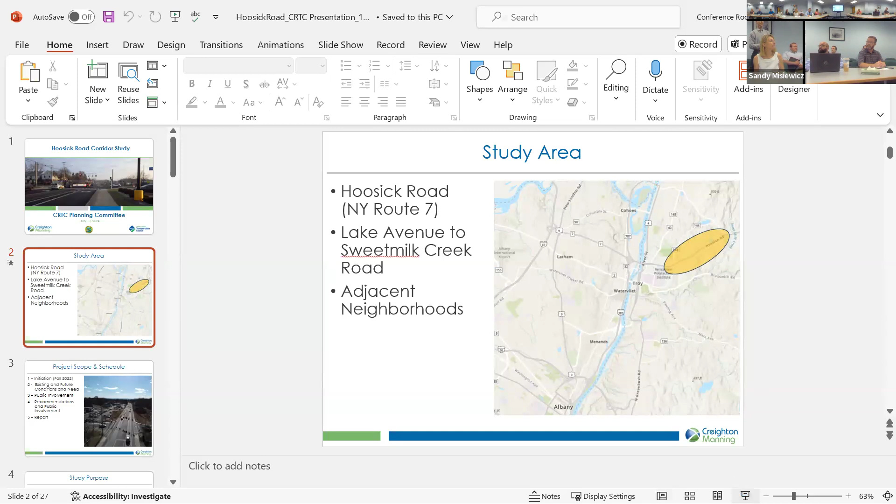Great, good morning everyone. We put this in PowerPoint slide mode, and we'll go through it. The study area for this linkage study is in the Town of Brunswick, just northeast of Troy. It's a section of Hoosick Road extending from Lake Avenue out to New York Route 142, a distance of about 2.5 miles. That Route 142 intersection is where there's the Stewarts, also called Sweetmilk Creek Road, that little local street that heads off there. So it focused on that section of Hoosick Road, Route 7, and also the adjacent neighborhoods.

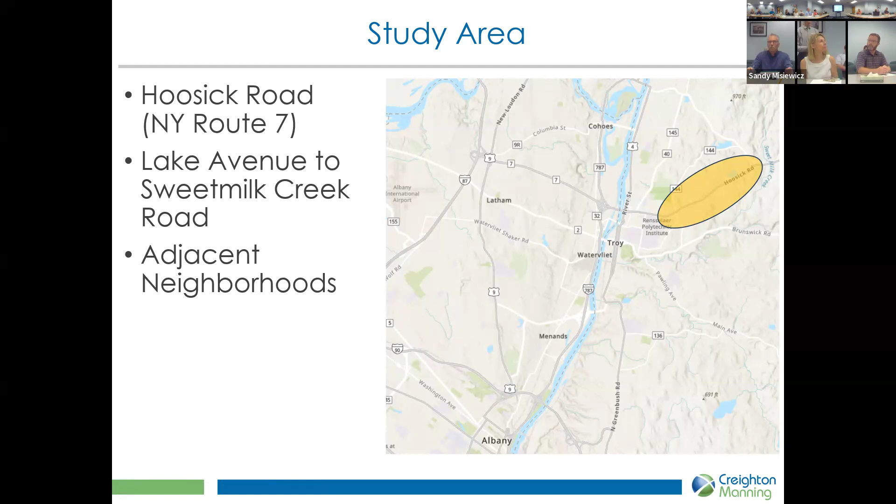The purpose is really to reduce congestion to the extent we can in a corridor that's constrained like this, and widening is really not an option. Improve safety and improve multimodal mobility.

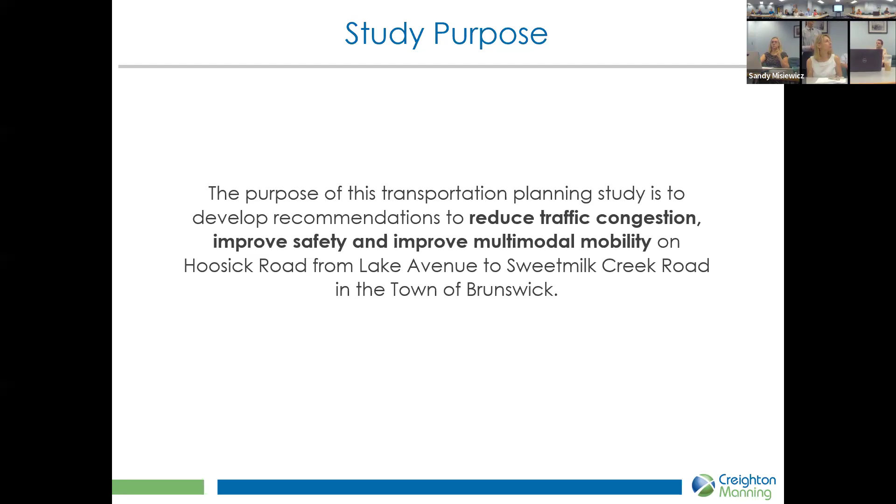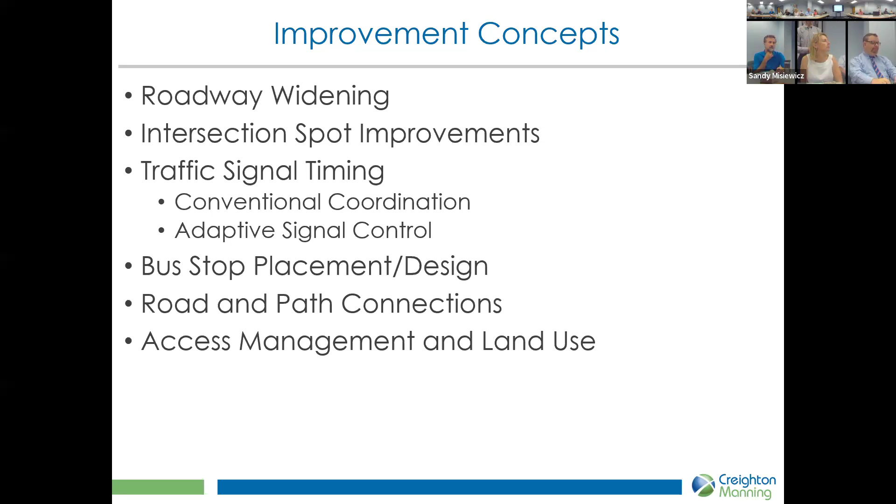We all know that you can't really build your way out of congestion, and we used that to inform the public of the challenges of this corridor.

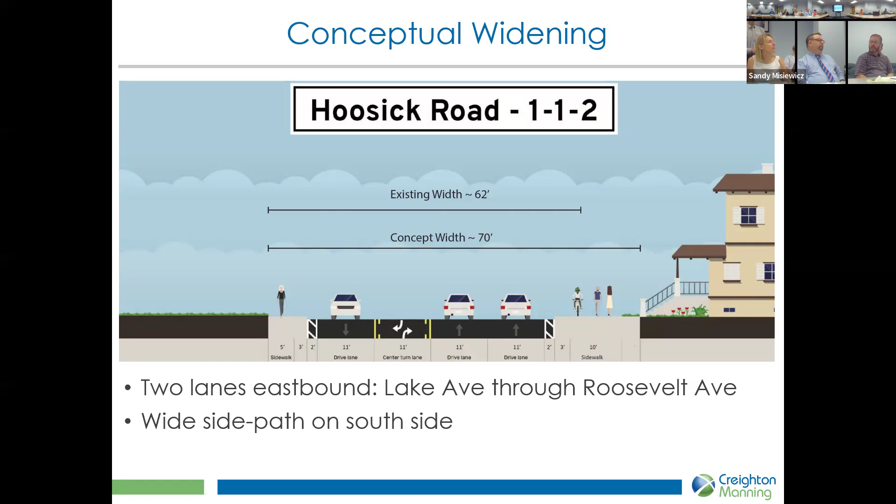We did introduce this idea of what we call the 1-1-2: one lane inbound, two lanes outbound toward the Vermont direction, to see if this could have any advantage. It certainly had fewer property impacts, but still probably not practical. It had a small travel time benefit, so it didn't go very far, but it would be similar to the section of Fuller Road here locally, where you have one lane in one direction and two outbound.

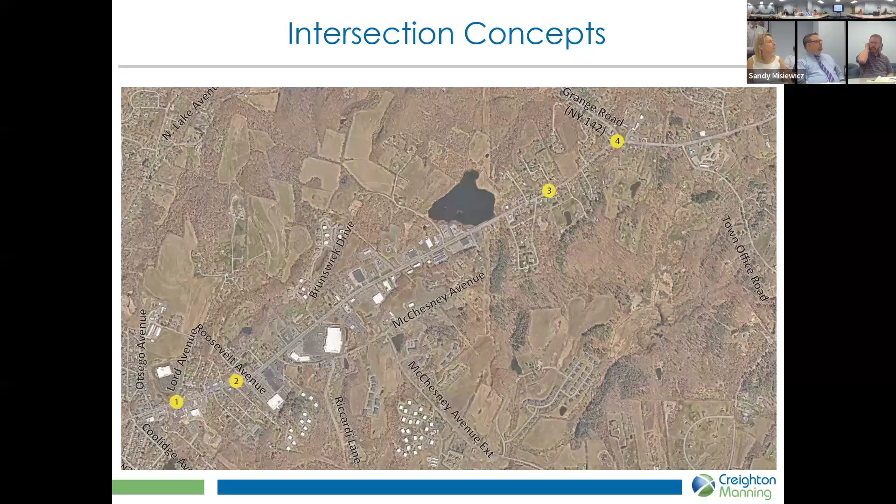So the study focused on a number of spot improvements to see where we could eke out any operational benefit, and I'll walk through those quickly.

There's a possibility of a roundabout at Lord Avenue. This would be an extreme challenge, to say the least. There's a significant embankment going down to a stormwater area, and the upper left portion of that circle would have to be a two-lane roundabout, which would involve property impacts. We questioned the practicality of this, honestly, but needed to evaluate it as far as we could with this study. It would have a significant travel time benefit. It turned out this intersection is really the main problem in the corridor. We had a lot of public outreach, and people said the corridor was bad before the Aldi signal, and now it's horrible - it used to be bad in one direction outbound, now it's bad in both directions. So it appears something could be done here at the Lord Avenue intersection that would address some of those concerns.

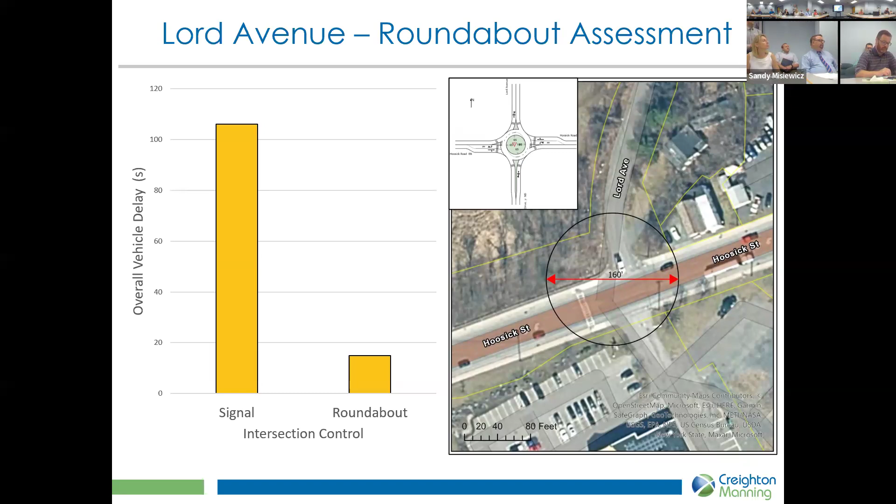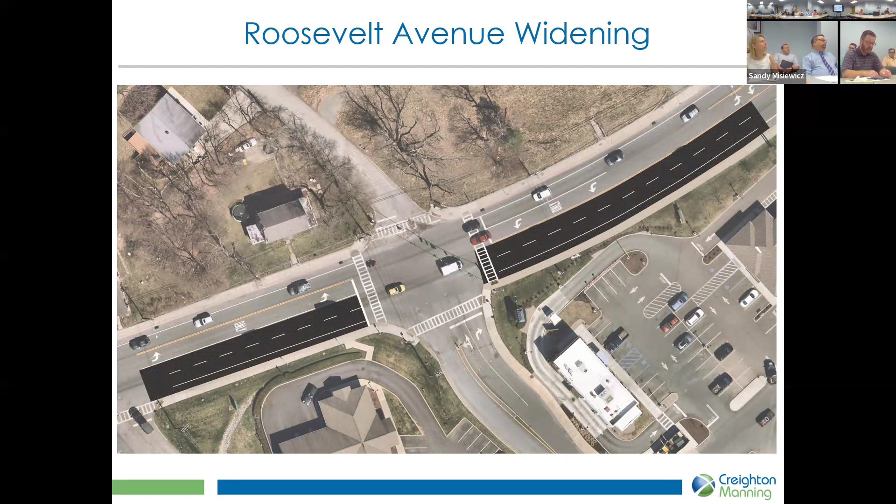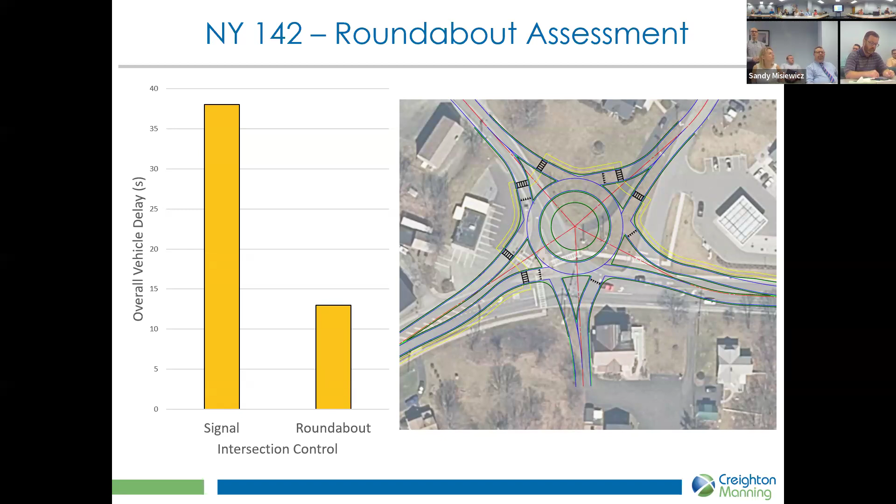This is an improvement I personally like. It's out on the east end of the corridor at the New York 142 intersection. You can see there's a travel time savings associated with the roundabout concept, and it's also a safety benefit, as we know, with roundabout concepts. This intersection on Sundays can back up three-quarters of a mile or a mile to the Harley Davidson and further out as people come back into the corridor. This would be a nice gateway kind of improvement and would be a good project.

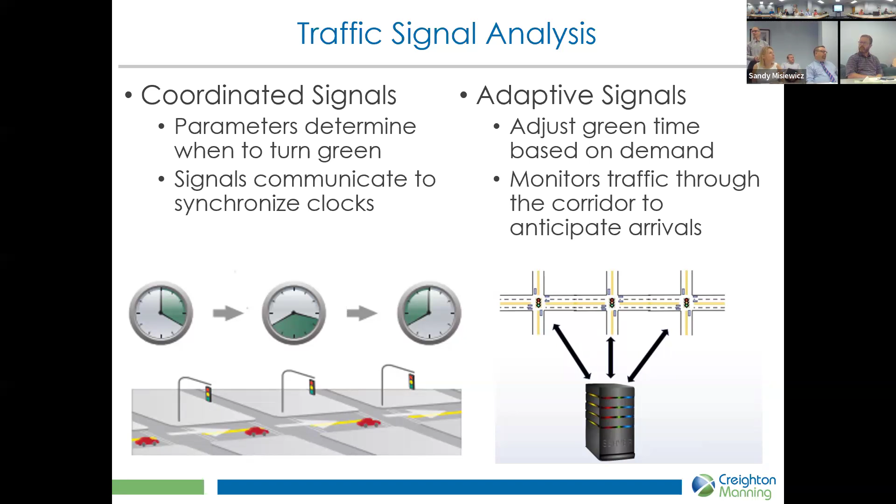The other thing we looked at is traffic signals. What could be done with them? They're not currently all coordinated. Some of them are, but this new signal in the middle is not part of that system. We evaluated coordinated and adaptive signal control, and had AKRF on our team for the adaptive piece.

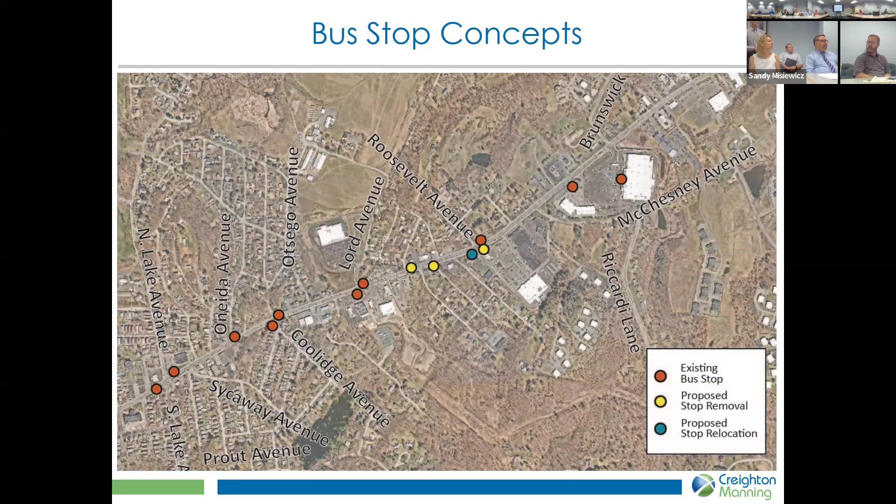We also looked at transit, the possibility of relocating some bus stops to place them closer to safe crossings, shown by the blue dots. That's summarized here, including eliminating a couple of lower volume bus stops.

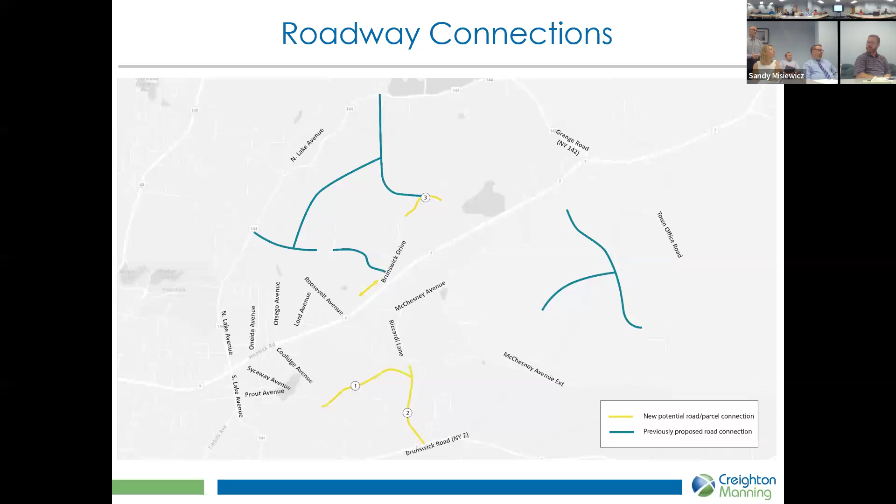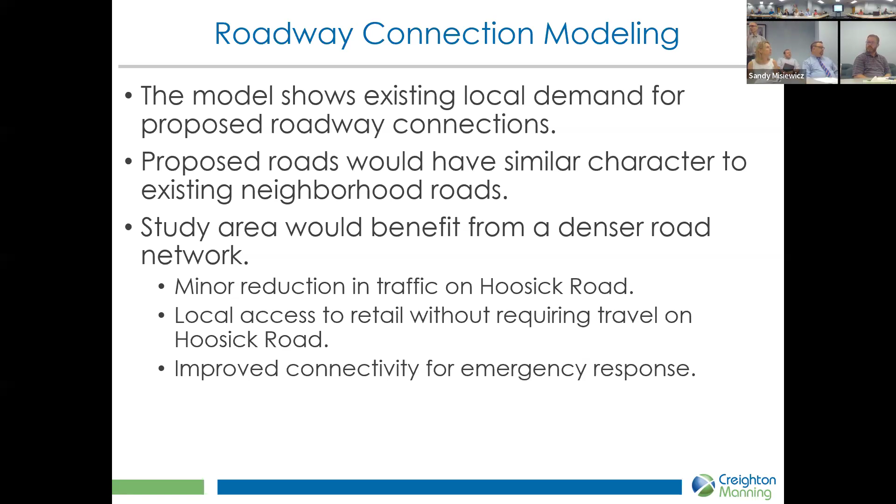The study also evaluated connections outside the study area, and CDTC actually modeled these. As transportation professionals we know connections like this are good—they establish a grid network and give people options to travel outside the corridor. It would move something like 3 to 4% of the traffic away from Route 7. The challenge is neighborhoods don't want additional cut-through traffic, and I'm sure you've all had those conversations with locals. So how do you really implement these things? There are some higher priority connections in the report that we'd encourage the town to pursue over time to alleviate congestion on Route 7 and give people travel options outside the corridor.

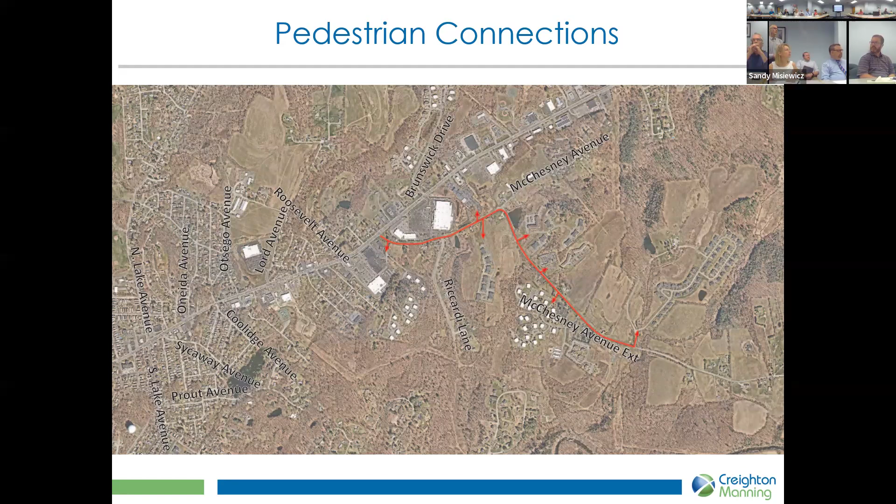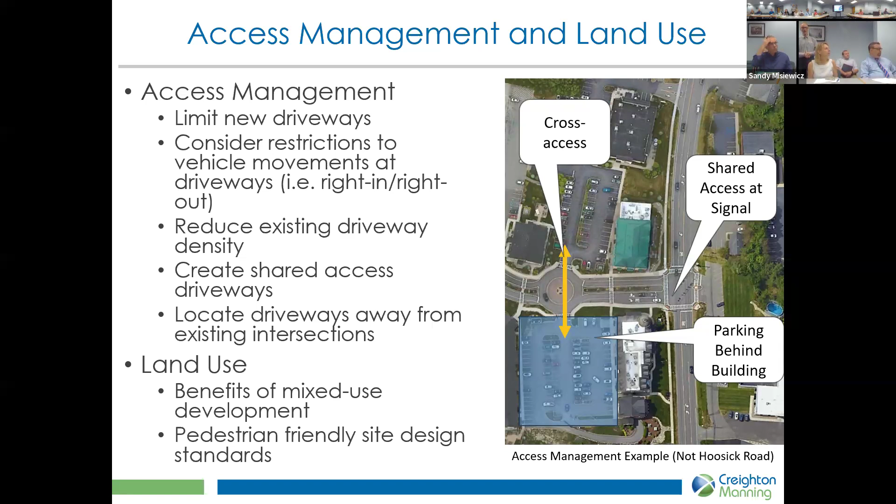Access management and land use within this study were approached more from a policy standpoint. We had a couple of site-specific access management recommendations that didn't go too far, and there's language in the report that the town should take to heart as they continue to evaluate applications in the corridor, both on the land use and access management side.

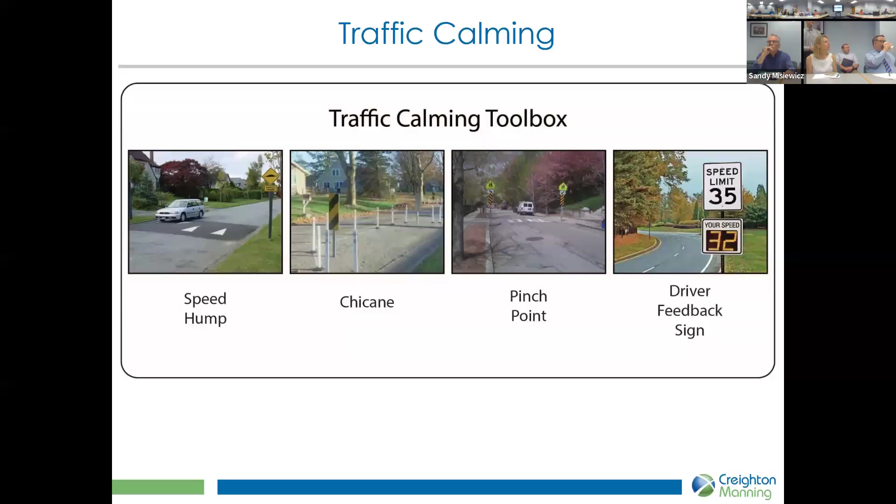Traffic calming was explored because people at the meetings talked about concerns with cut-through traffic and speeding in their neighborhoods. There are a number of things that can be done to ameliorate that, so traffic calming is part of the study, and there was support for that.

The last one here—I don't know if it's actually the last—came out of public involvement. There's a bit of crash history at this intersection, on the east end of the corridor. You can see the embankment, a little hard to see there. Short-term measures would improve the conspicuity of the warning signs for that intersection, and longer term, see what else can be done, like regrading the slope.

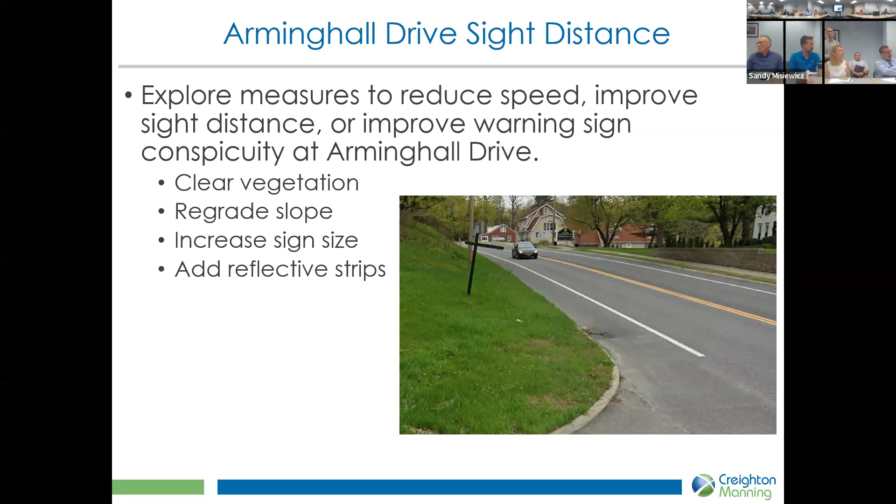It's all summarized in the report, which is on CRTC's website at this time, with an indexed map and discussion of all of these concepts.

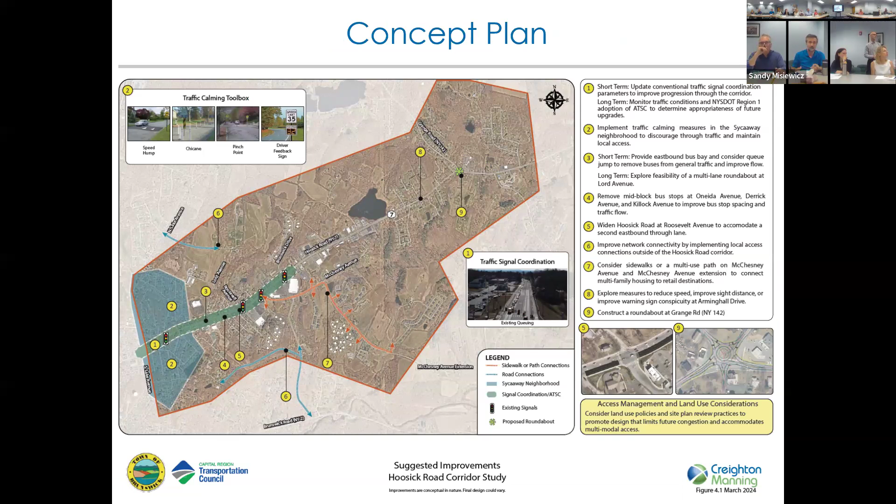Is the eastbound travel lane the widening now? Yes, it would be a smaller widening. Is it the one you were showing where you would just do that little bit?

Yes, and so in concept, that widening wouldn't even have to be the width of a full travel lane. Because there are 13 and 14 foot wide travel lanes out there today, and you could go with a narrower lane to try to minimize impacts.

In town, this road is owned by the state, it's a state highway. So it's not in Troy. If it was in Troy, you'd have 4 lanes logically to get through the amount of buildings that the town has let them put up.

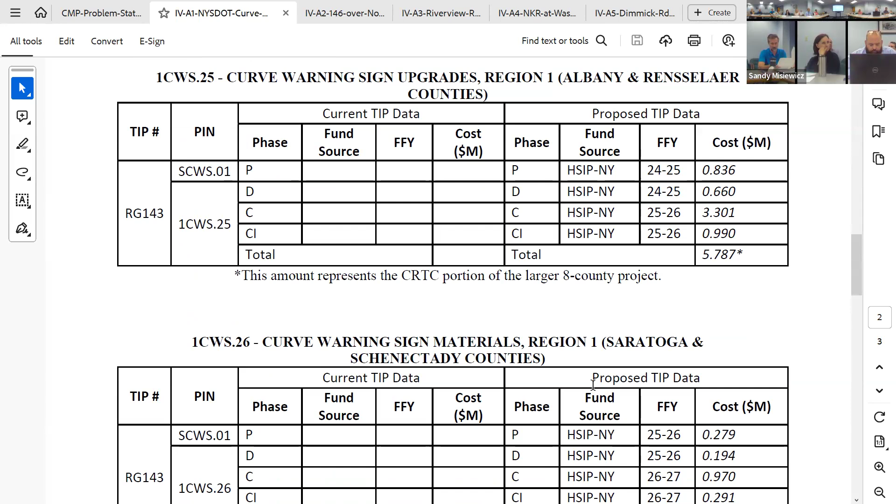So here we are with the approximations of how much we'll spend here. The plan is to let a project for Albany and Rensselaer counties, and then follow that with a project to hit Saratoga and Schenectady counties. All in all, the total project will shoot for about $7.5 million to implement this initiative. Wow, signs, a lot of signs, a lot of curves. Money and signs, huh? A lot of curves.

Greg, are these different looking signs or moving them back? Larger spacing changes, closer spacing, you know, they're usually behind guide rail curves. So currently the spacing and the size are deficient, so now they'll be newly reflective, so they'll be better at night, bigger and closer and so it adds up. And again, this is from a statewide pot, so this doesn't hit the core.

Does the DOT GIS locate their signs like some other counties do, or do you actually have a sign inventory? I know some counties have a really good inventory. I don't know if it's GIS entirely, but they definitely know how many on each road. Right, yeah, that's what I mean, because I think it was Saratoga County, Schenectady County's got it, I think, Steve, but on the back of the sign is actually a barcode.

Scan and locate it on there—so it's about $7.5 million worth of curves. I don't have the figures in front of me, but it's like hundreds of curves they have to go through. Are you putting them in yourselves, or contracting that out? I think contract out, yeah. We don't have the resources, so it'd be a lot less.

Seems the spacing is a big issue. Looking at some of the new applications, like in Schenectady, when you're getting on the highway where the toll booth used to be, there's like 100 signs now just to take care of the curves. The visibility—it's almost like a continuous signage because of the proximity of their location. But on a road done many years ago, they're much further apart.

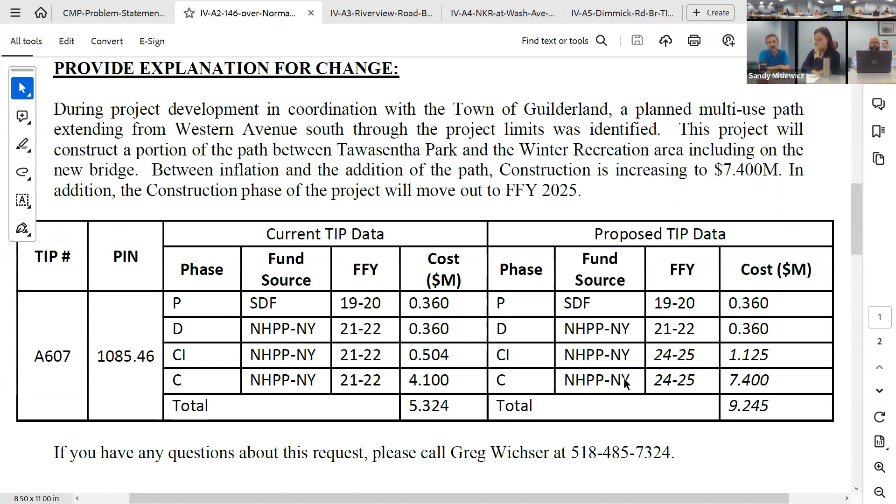It has been in design for a while, and through outreach our friends quickly reached out about a planned multi-use path in this corridor. So through the development we're modifying the scope to include a multi-use path on the bridge to the logical termini of the winter recreation area and Tawasentha Park. This is to add funds and scope to include this path, and of course incorporate some identified inflation as we are nearing the final plans and estimate.

So, this is to fully fund the final estimate and new scope of the project. Any questions on that? The multi-use path is 3 million plus - no, the inflation and the path together are 3 million plus. The path itself I don't know exactly, probably 1.5 to 2 million.

It's an NHPP project. How long does it extend? Down about 500 feet to the south, and then 500 feet to Tawasentha Park - maybe 1,000 feet of path total. And of course the bridge itself had to be modified to accommodate it.

Steve, what's the winter recreation area there? It's used in the summer too, it's part of the park. There's trails, but they call it winter recreation - it's where they do the sledding. It's in that park, on your way towards Keenholz, as you pass Tawasentha, same side of the road - that's where the bridge and mud races are, all the good stuff. It's about the same distance from the bridge as Tawasentha - it's across from the town's other parkland.

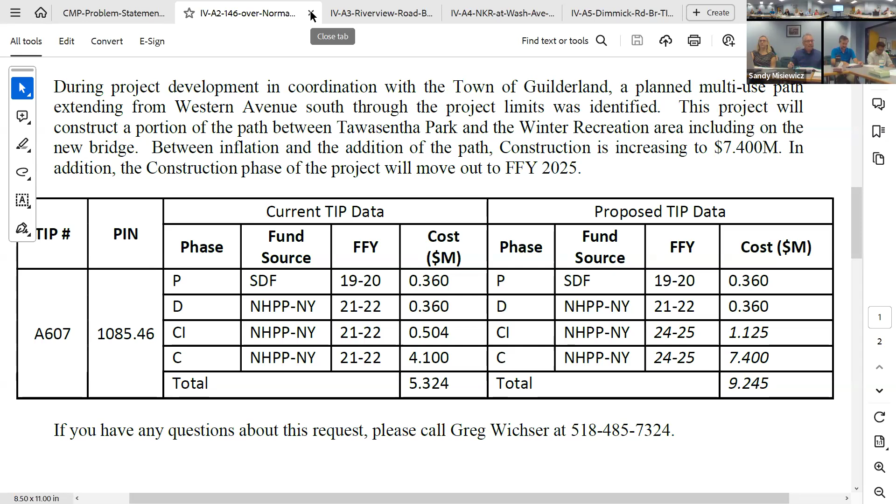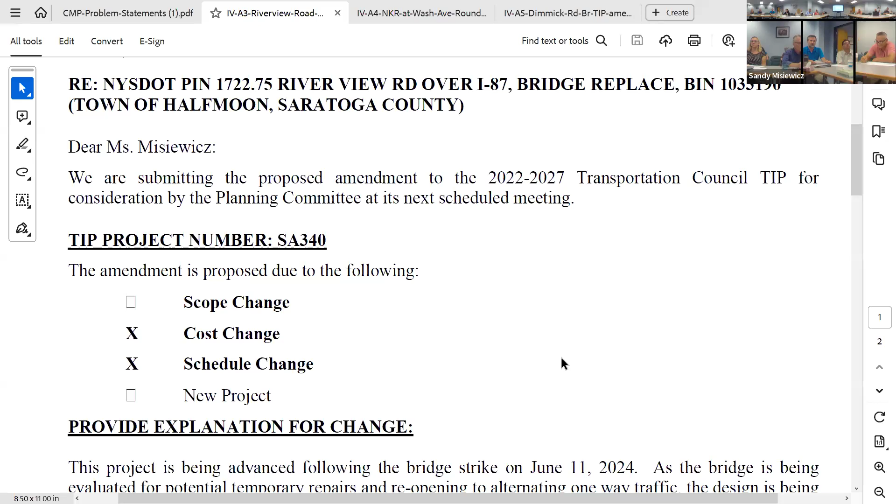Amendment 3, Riverview Road over I-87 bridge replacement. A few years ago, when Sitterly Road was hit, our structures engineer said now that's out of the way, Riverview is the next low bridge at 14 feet and change, not 16. That's at risk - it's the last bridge under 16 feet from the thruway until Essex County. Unfortunately, it was struck and damaged, and it's now closed.

When we put this in the 5th year of the TIP, we start addressing design to hopefully get it out of the way. Since it was struck, we're proposing to advance this from the 5th year into the current TIP to accelerate replacement. That needs planning and policy approval, because moving it from the 5th year is technically unfunded, so we're bringing it into the 4 years. We've also updated the original estimate, since we've seen inflation since the last TIP was done. This represents the current high level estimate for replacement of this bridge.

The fiscal constraint impact is an interesting conversation that'll continue into the next TIP update. Between regional moving of money and statewide folks that aren't always spending their fund source, we're able to add some planning target to maintain the fiscal constraint balance at the table. So it's interesting times with the ability to do something like this. That's the situation we're in right now.

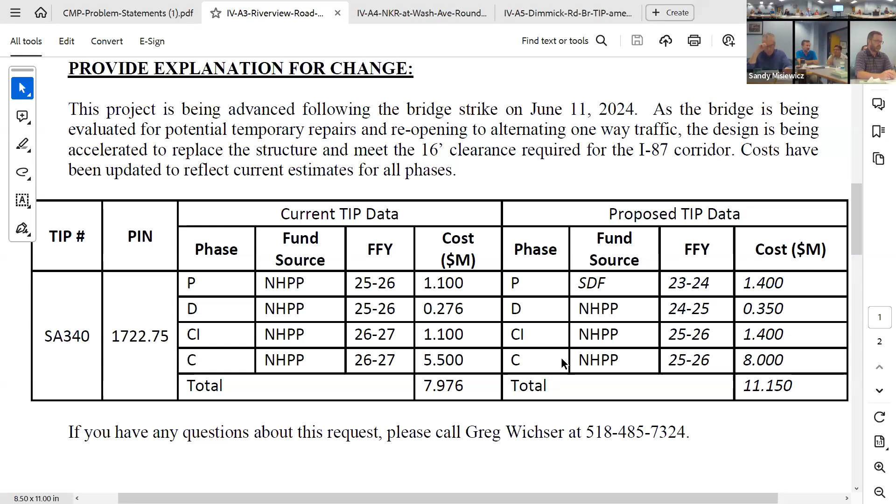What's the traffic on this bridge? It's around 800, actually more than Nelson Ave. That's what I'm saying, it seems like a Nelson situation - are you even looking at whether you need the bridge? Through the process, I'm not gonna lie, that needs to be looked at.

This seems just like Nelson. There's enough businesses around it that we have to do our homework and read the room, but we're anticipating a similar situation in Nelson - that at the end of the day, that is likely not a tenable conversation. Have you ever had a bridge meeting where you said I'm going to close the bridge and everybody said I agree, I'm so happy you're closing this bridge - has that ever happened?

Yeah, actually down on I-88 we did, and the people on the road loved it because now they live on a cul-de-sac. So we've been successful in removing bridges, but it's got to be a very short detour. The recipe is short detour, low traffic, and no businesses - if you can check all three boxes, you can at least advance the idea. But without all three, it's a very challenging conversation.

Any more questions for Greg? Can we get a motion for the I-87 bridge replacement cost increase?

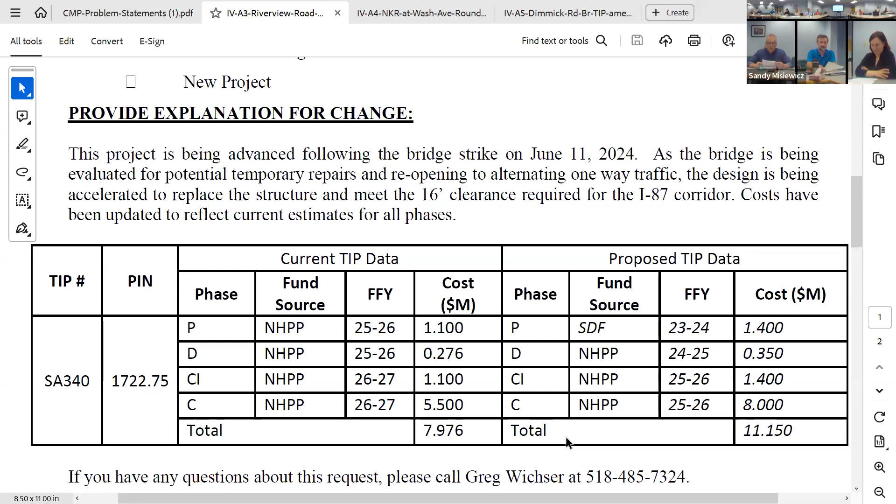Wait, Lisa, get a second. You're smiling, Andrew, is that okay? Say it all. Any further discussion? All those in favor, aye. Opposed, abstained. Thank you, motion carries.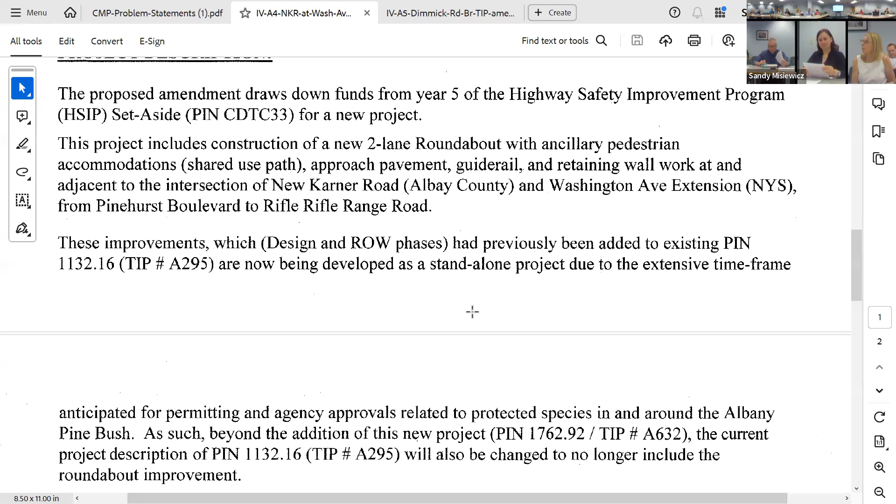Amendment 4. New Karner Road and Washington Avenue roundabout, is that where we're at? Yeah, Albany County, Lisa's gonna. So we currently have a New Karner Road rehabilitation project in the TIP that includes a new roundabout.

And through the design process, we've learned that there's an extensive time for permitting due to an endangered species, the Karner blue butterfly. The whole permitting process would set the project back long enough that we are concerned the road really needs to be paved sooner rather than later. So what we're proposing is pulling the roundabout out of our roadway reconstruction project and making it its own project, so we can progress the paving of New Karner Road sooner, and have the roundabout still happen, but a few years down the road.

Now, this is HSIP, which is curious too, because it's more than when I look at the regional - I know because they sent us the HSIP study that Carrie's been working on, or some consultant's been working on, to identify locations with high accident rates. So I was going through that.

Okay, do we have anything that's gonna be eligible? And this intersection doesn't show up. So then I started thinking, okay, HSIP, it used to be like, well, you gotta have - because I've approached the state before about other intersections with lots of accidents. Well, there's a ton of volume, so the accidents, in CLEAR, you would need like 6 deaths and something else to be eligible. So when I looked at this one, not to say it's not a good project, and there's a lot of congestion there, it just doesn't show up.

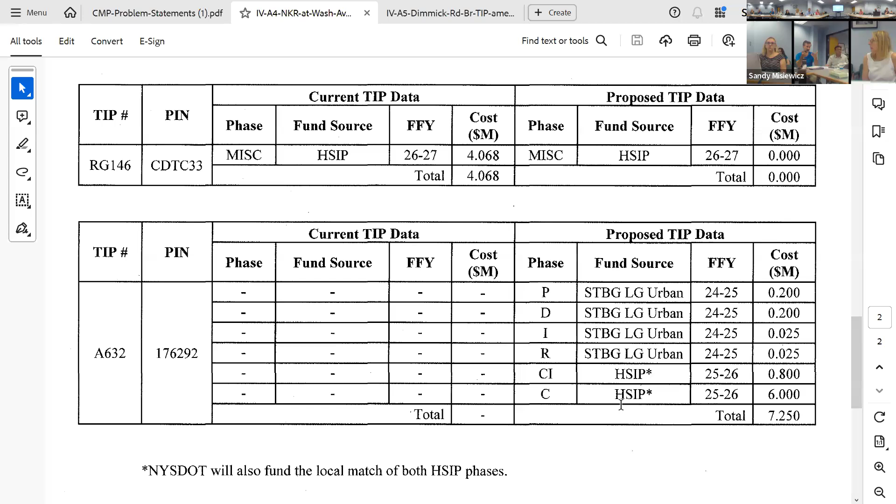Shouldn't it say that somewhere? Well, it says a local match, but it doesn't say anything about the $2.8 million gap. For instance, Albany County doesn't have control over planning targets and statewide awareness, so we are bringing 2.8 more million to the table, saying we're going to add 2.8 million to the planning target because we're aware of the statewide lack of spending HSIP.

And then how come we don't talk about project 295? Where's that guy? This says that 295 will be changed to no longer include the roundabout, so shouldn't 295 have a decrease in funds?

I'll just chime in quickly. 295 never really included the funding for the roundabout, it originally had no roundabout. I think it was around November last year, the county said, hey, we're going to add 150,000 because we think this roundabout's coming, and I think it was added right away.

So instead of doing it as an admin mod, we did it as an amendment and added the roundabout description to that project. Then a month or two later, it's, well, actually we think that's going to be a different project, so this is truly a full new funded project. The funding wasn't initially in 295.

I don't know how much you guys really care about this being some kind of official document. It just seems confusing as hell. I look at this and I'm 2.8 million short. It says it's a year 5 set aside, so it looks like I'm committing myself to next year's set aside to make up the shortage. And a roundabout got changed, but we don't put the roundabout on here like we usually would, so it just doesn't look like the roundabout's associated with it.

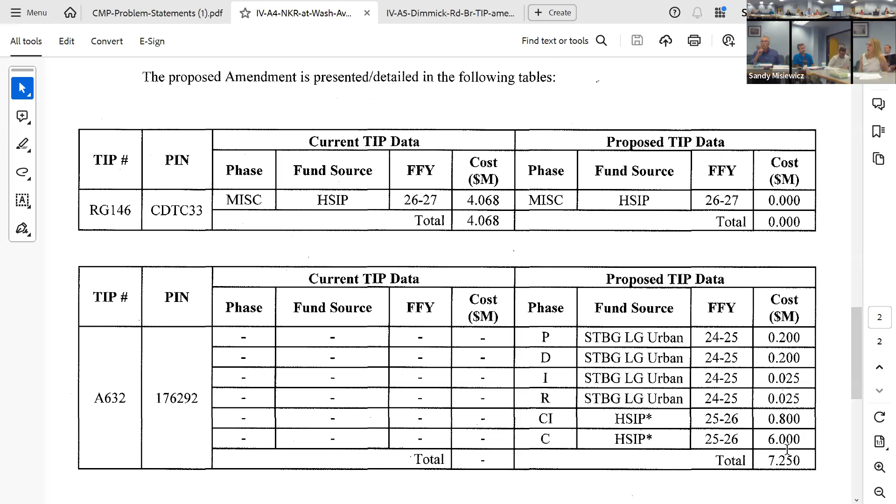No, it's not. I think Joe Semino is on the call too, and he can comment on that. They wouldn't have recommended the roundabout as an alternative if it was going to have deleterious impacts on lights ahead and behind it. It wouldn't have even made the cut as a design option. So the traffic backing up to that intersection isn't really an issue.

Sounds like it's not, at the end of the day. But Joe, I see you unmuted yourself.

Yeah, certainly that traffic at those two outside intersections was part of our study. There are some level of service concerns at those existing intersections, namely Route 20, and also at the other end of the project, the Vly Road intersection, which is actually being repaired now by the county under another project. So looking at those intersections, we do show some congestion there.

The spirit of the first project, though, is the overlay and fixing of the pavement construction itself. The roundabout, or this intersection in the middle of the project, became prevalent when we, in due diligence doing our design approval document and so forth, did traffic analyses here at this New Karner and Washington Avenue extension as part of our typical due diligence for traffic studies. That's where we saw quite a bit of congestion.

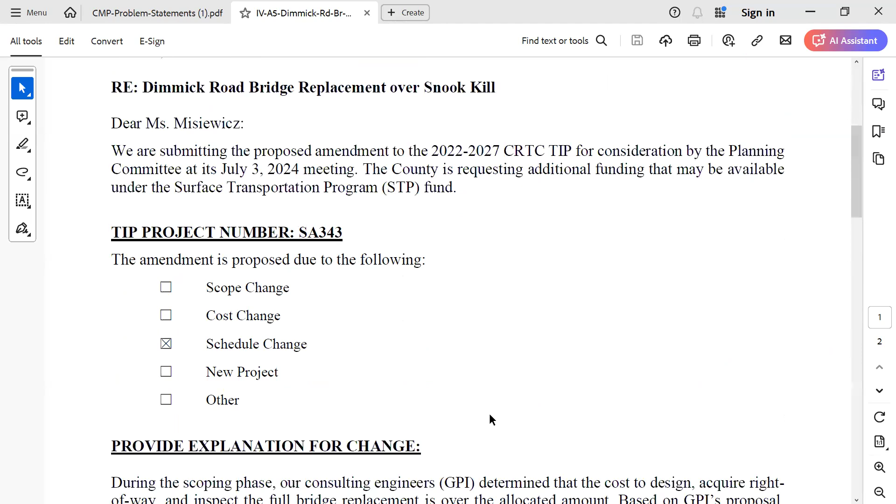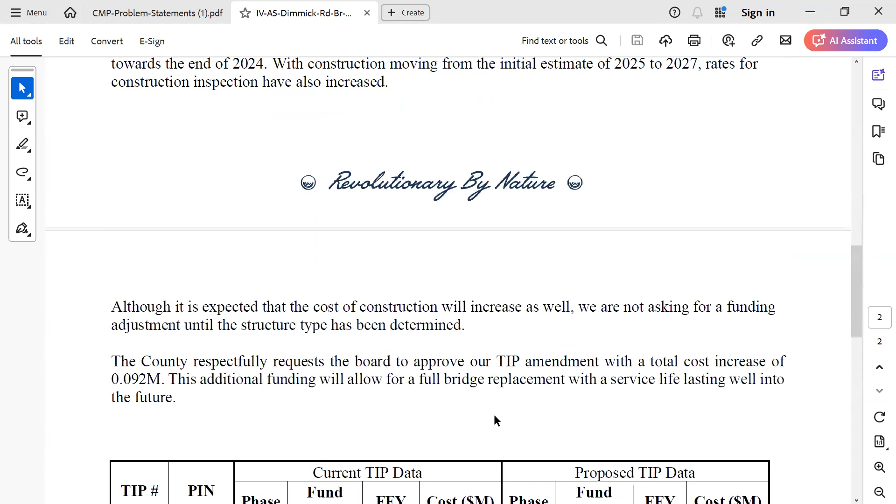We're looking for the schedule change, just pushing things out a little bit to getting started here. We see that the SLA would probably be towards the end of the year, so that would push the design and right of way into next year. Just kind of the way the environmental process is going too. We also know that's going to push things out, just kind of the historical way it's been going here recently. It's taken a little bit longer.

So with that, there's some slight bumps in funding, hopefully minimal. Once we determine the exact structure we're looking to replace it with, we will probably have to come back requesting some construction funding. There is construction funding for it, it's just - with the inflation there, prices have been going up quite a bit, as we've all seen. So the cost increase for this is just reflecting that.

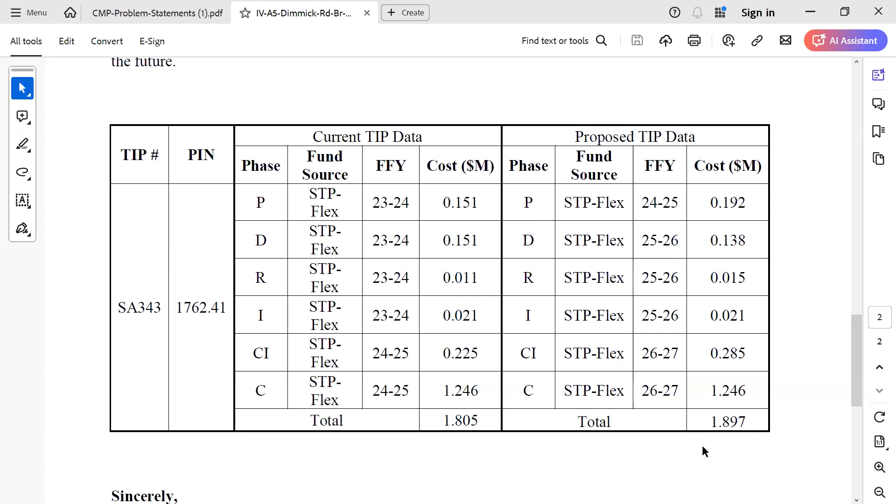So there's some small cost increases, not in construction. But truly what brings it to the committee is moving the construction year from '25 out into '27. Cost increases could have been done with an admin mod, but moving that schedule is what brings it here. That's the schedule move. And he's saying likely at some point there may be a need for more construction money, which we would address.

Is there anything specific in the environmental review that's causing the delay, or is it just general processing slowdown? I think it's just general processing slowdown, nothing specific here at this point. All right, so it's just a schedule move at this point. Correct.

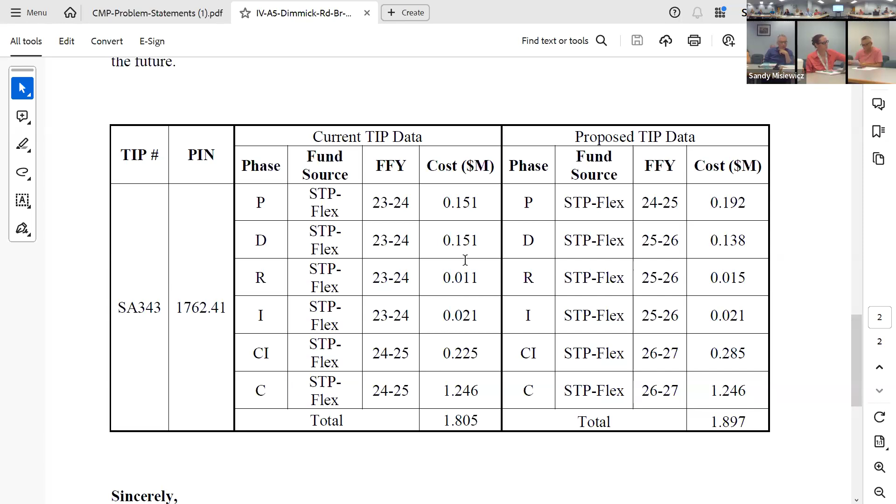Any questions for Greg? Any more discussion, or can I get a motion to approve their request for the schedule change? Motion, Andrew. Do I have a second? Second. Any further discussion? All those in favor, aye. Anyone opposed? Abstained. Motion carried. Schedule is changed.

All right, item 6, implementation plan, assurances, revision and update. This will be super quick compared to what we just went through.

As part of our certification review a few months ago, one of the topics that came up was our Title VI procedures. Since that time, the Federal Highway Administration during the review pointed out that we had some dated material and that there were some better practices. So we've updated our Title VI document to reflect those revisions, which primarily relate to who a Title VI complaint would go to - it would go to the Federal Highway Administration. That's essentially the revision, so I just need your approval to make that change. We'll have the policy board endorse it as well, so that we can make it part of our official policies.

Thank you, Sandy. Any questions, Sandy? Can we get a motion? Motion. Thank you, Greg. Let me get a second. Thank you. Any further discussion? All those in favor, aye. Opposed, abstained, motion carries.

Thank you, Sandy. Congestion management process, technical assistance, field visits and problem statements. This is Andrew, he'll be describing this. I think of the setup.